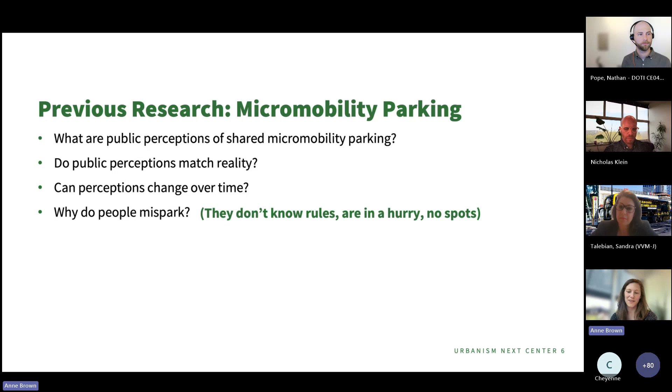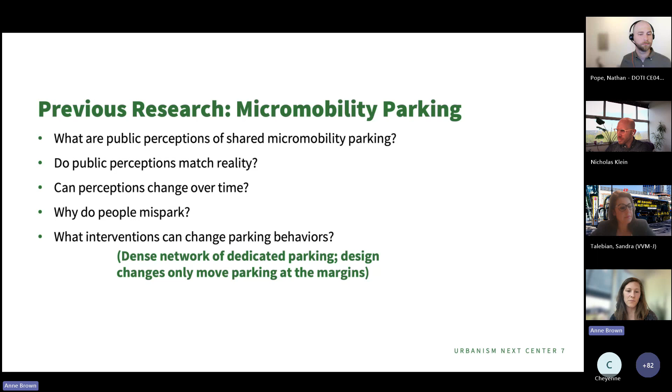Then, what interventions can change parking behaviors? Generally, research shows that dense networks of dedicated parking can shape and shift where people park, and that design can change a little bit of where people park, moving people at the margin. So the most important piece is the density of that parking network, followed by some marginal shifts based on design.

So all these questions and background lead us to the question guiding our webinar today: what are the best practices for how to design, scale, and budget for micromobility parking? The goal of this is really a practice-oriented webinar, hearing from those who have studied these issues and have implemented them.

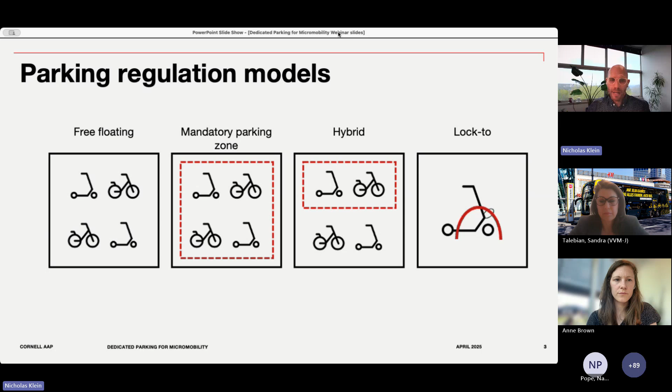If we think about the types of regulations or regulatory schemes you might have, there are free floating programs where users can park anywhere within the zone. We also spoke to people who work in places with mandatory parking zones, where within the zone there are certain geofenced areas where you can park and you can't park elsewhere. Then there are hybrid schemes with a little bit of both—mandatory parking zones downtown, but perhaps more free floating in residential areas. Finally, we talked to people in cities where they operate scooters and bike share systems where you have to lock it to something—so it could be dockless, but it has to be locked to some sort of device.

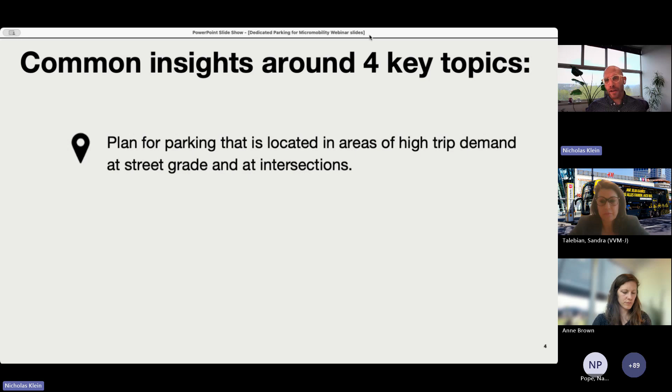I want to highlight 4 key insights or topics we heard from people. The first is that planners, regulators, and other decision makers really need to plan for parking that is located in areas of high trip demand, at street grade, and at intersections. I'll talk more about each of these going forward.

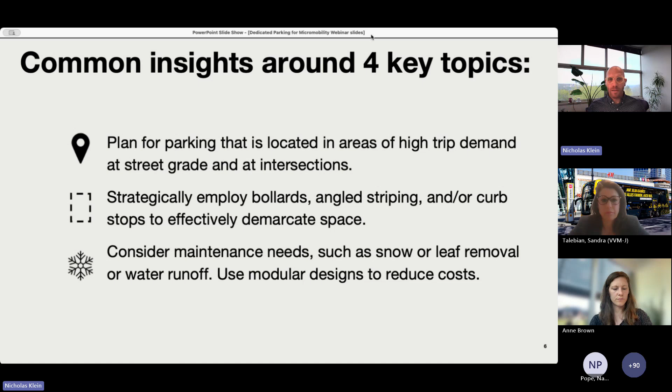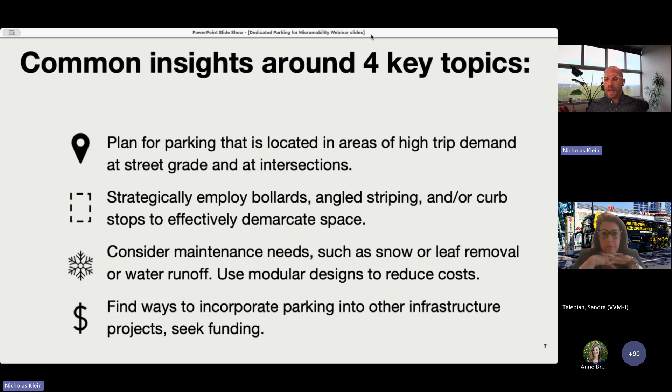Secondly, to strategically employ bollards, angled striping, and curb stops to effectively demarcate space—to say this is where micromobility parking should go. Thirdly, to think about maintenance needs, whether that's snow, leaf, or water runoff, and to use modular designs to reduce costs. And then fourth, to find ways to incorporate parking and other infrastructure into other infrastructure projects, and to think about the funding aspects of this. This is what we call the nuts and bolts.

So I'll start by talking about planning for parking. Each section of the report highlights several recommendations, and I'm only going to talk a little bit about some of them.

Hopefully my colleagues and in the Q&A we could talk about more in detail.

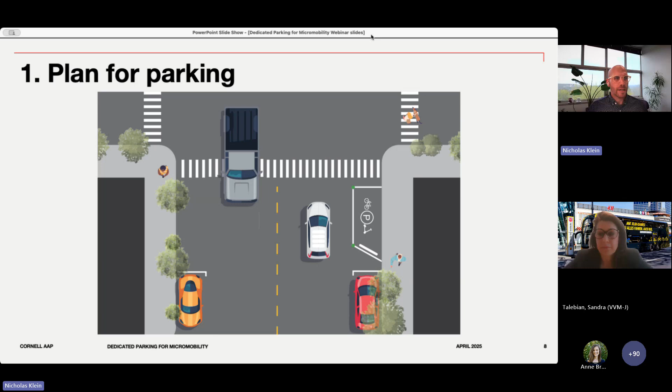One of our recommendations is to build parking at grade on the near side of intersections. This has a number of benefits: it allows for daylighting the intersection to improve visibility and safety for pedestrians and micromobility users. It typically doesn't compete with conflicting uses like metered parking or loading zones—it doesn't mean there are no conflicts, but there are fewer. And it can use previously unused space and possibly generate new revenue through fees paid by micromobility operators.

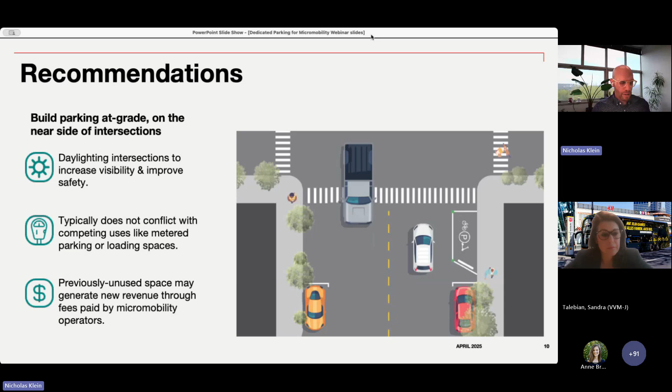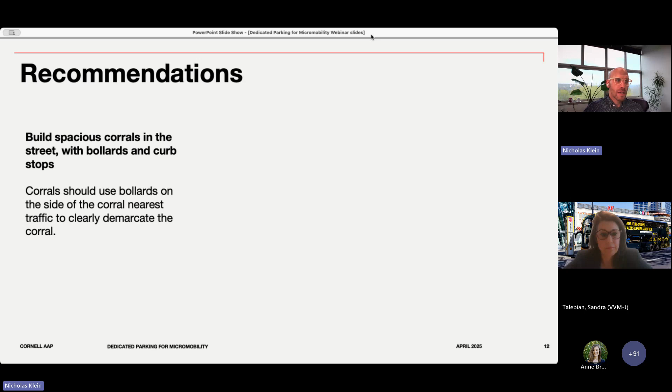Secondly, when it comes to the parking design itself, we heard from a number of different operators, regulators, and planners about ways to think about this. One recommendation was to build spacious corrals in the street with bollards and curb stops, using bollards on the street side nearest to traffic to clearly demarcate the corral.

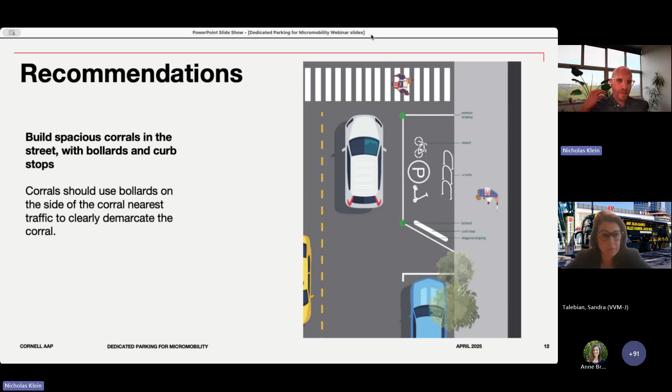In this diagram in the report, you can see the green circles representing the bollards on the street side—sorry, these images aren't popping up—but the idea is not having bollards on the sidewalk side, only on the traffic side.

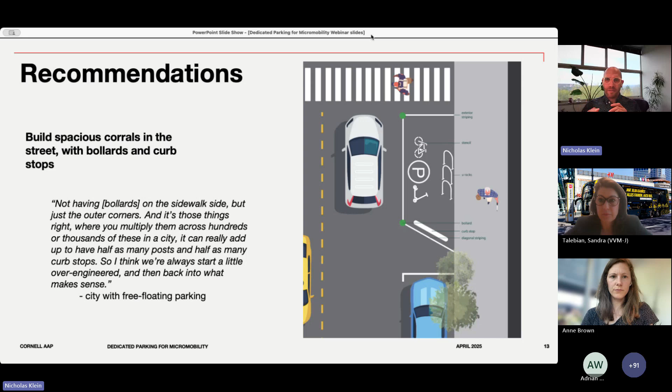We heard from one person who said that these kinds of design choices, when multiplied across hundreds and thousands of spaces across the city, can really add up to half as many posts and half as many curb stops. They said we tend to start over-engineered, then work back to figure out the minimal requirements for a safe, well-regulated, well-managed on-street corral. Someone else said, we realized maybe we just need one curb stop—shown at the bottom edge of that diagram—which reduces cost, and it wasn't really needed on the intersection side since vehicles don't park there.

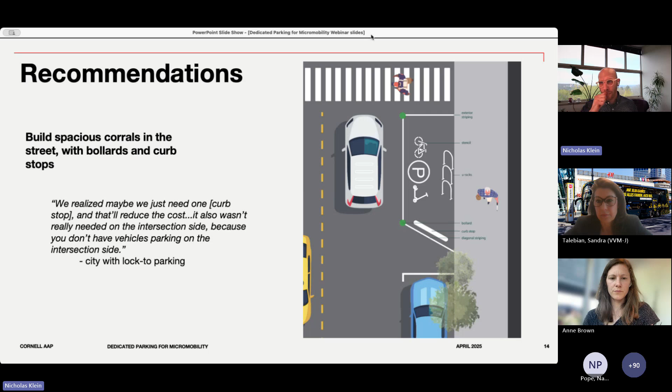When it comes to maintenance considerations, we heard a lot from people about thinking about seasonality, using modular designs, and trying to keep it simple.

Taking winter into consideration, one person said that on-street corrals are going to be a nightmare for snow clearance—it's not really feasible to get them cleared without destroying the bollards all the time. So we find that sidewalk corrals are much more feasible.

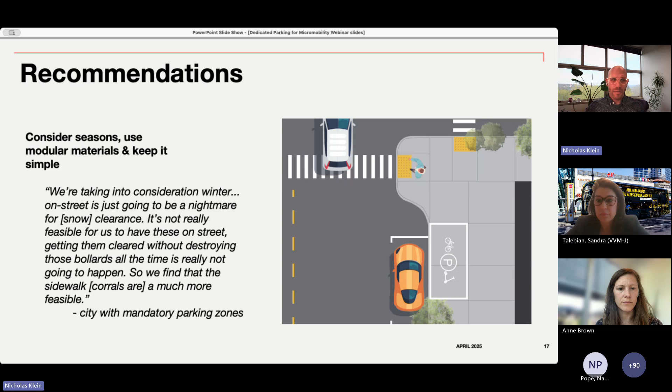In the previous slide we talked about on-street corrals; here we're talking about sidewalk corrals. A recurring theme is recognizing local context—not just of the intersection, but of the city itself and what's going on there.

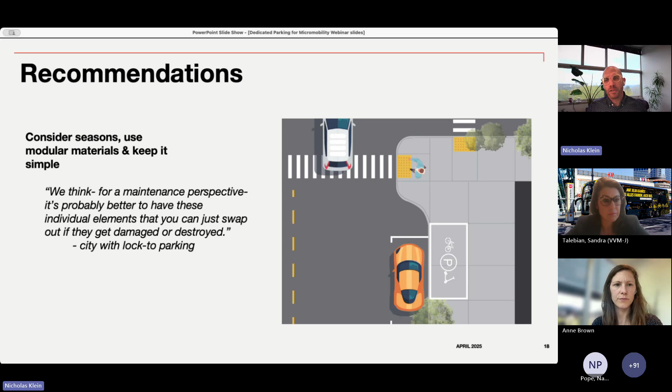Another person said that from a maintenance perspective, it's probably better to have individual elements you can swap out if damaged or destroyed—thinking about modular designs rather than hard infrastructure that's more difficult to install and replace. Another person emphasized keeping it simple, noting this allowed them to roll it out at a much bigger scale for very low cost.

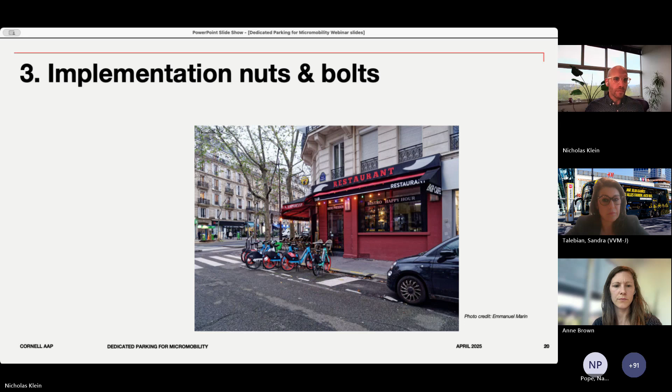It's very minimal. So now turning to the nuts and bolts of this, we heard about identifying funding streams, streamlining processes, thinking about grants, and recognizing that micromobility parking is relatively affordable.

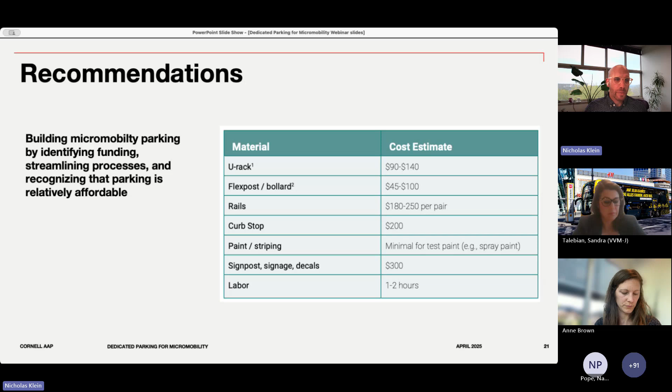One example: people told us that two U.S. cities estimated the material cost for a single corral would cost just over $1,000 USD for 4 racks, 1 rail set, and 5 flexposts. We have a couple other cost examples in the report, and obviously prices are changing—who knows what the latest cost would be.

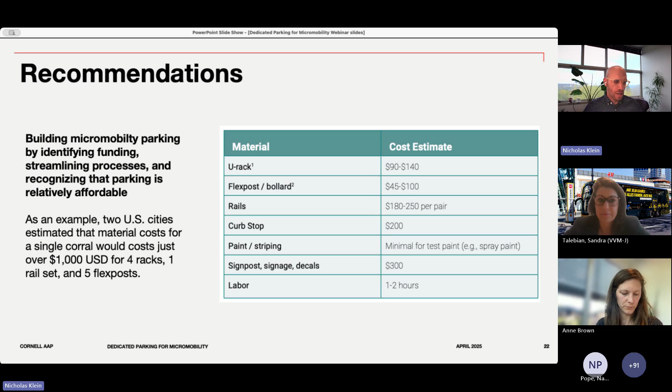But just to give a sense, relatively speaking compared to other transportation infrastructure, this kind of parking can be relatively affordable. So I'm going to wrap it up there to give you a tease of the report and let my colleagues talk in more detail about their experiences. Thanks, Anne.

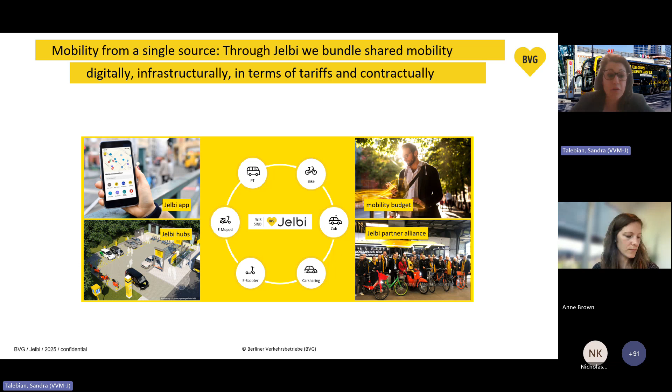We have the Jelbi hubs, our parking hubs - I will explain them shortly. We have a mobility budget where we bring companies all the different mobility options as a new sustainable mobility option to their employees. And we build up a huge Berlin-wide partner alliance with all the different stakeholders.

A lot of the stakeholders are for sure the mobility providers, you see them here on the left side - scooters, bike sharing, car sharing, etc., and for sure public transport. We built those in combination with facility partners - hospitals, shopping centers, housing companies, and so on, and also a lot of facilities like gas stations, etc. So we bring all the different stakeholders together by implementing the new mobility solutions.

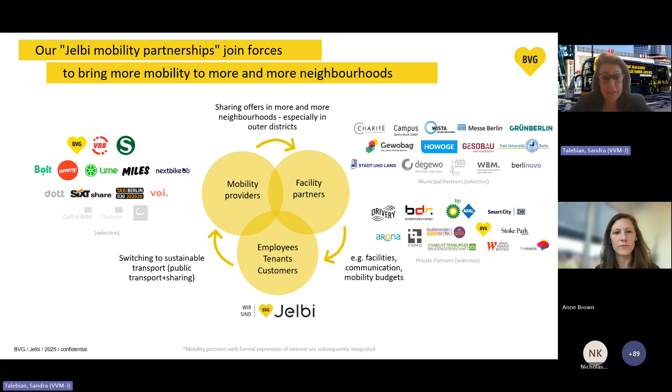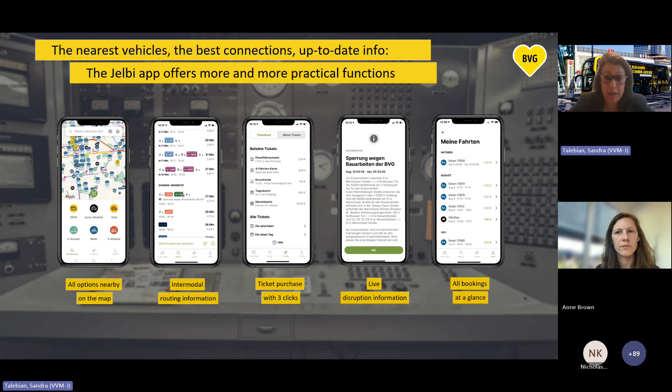The app brings you all the different options in one solution, so you don't need to download all the different providers' applications. You can have that all seamlessly - ticket purchase, car sharing, and also kick scooters - in one application.

We bring that to Berlin, and how we do that since 5 years - I'll draw down the process chain of how we come to those spaces. So either we implement the Jelbi hubs on a public space, we have a data mobility platform that we can use where we see live status, where the vehicles are parked right now, so we can identify hotspots.

Where mobility parking is urgently needed, we do the location review - we have an on-site visit, we go with all the different stakeholders there, walking all the different spots and really check if this is a possible spot to implement a Jelbi hub. Then we send out the forms, if it's a public space, to the different districts. Then we go into the planning, and after getting approval from the district, we build it and then open it and inform the sharing providers.

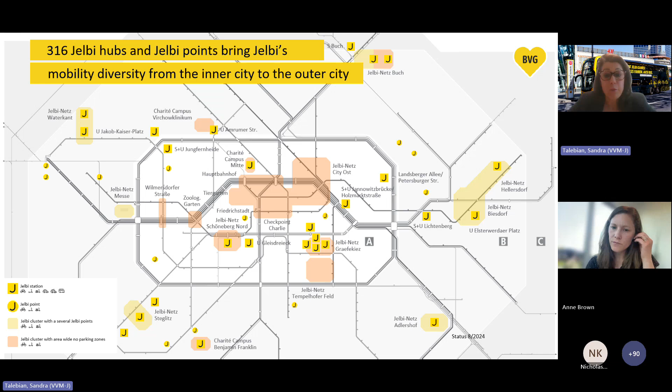We have with the city of Berlin, with the Senate, 3 different options where we are financed. We have a research and development project until end of this year - so this year is actually a very important year for us to really prove that we bring a benefit to the mobility change and mobility behavior of the Berliners and visitors, etc. We need to prove until end of this year that this is also viable for further development.

We have a second partnership or contract with the city of Berlin that brings us into those dense areas where we implement, every 200 meters, mobility parking to really bring order and cleanness on the pathways and get rid of the clutter or different things. And the last project that we call JaaS - it's Jelbi as a Service.

We are implementing Jelbi hubs and points for private partners where, for example, the big hospital Charité in Berlin, paid for having mobility options at their door for their employees. So we built 3 different channels of financing, and we will see where we end up before the new finance round is agreed.

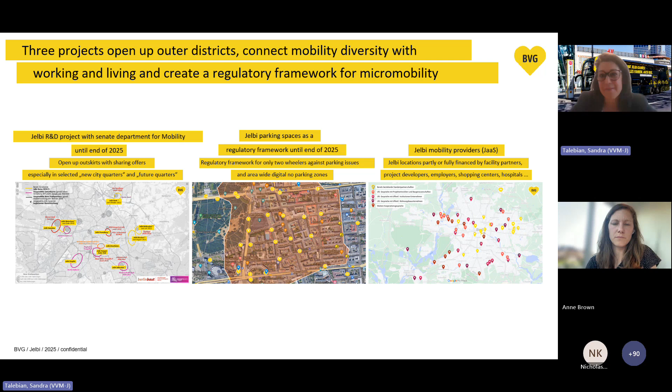What topics need to be taken care of while implementing parking spots for micromobility? First, it's planning, monitoring and evaluation, to really check in which areas it makes sense, where the operators are going, where there's a high need for implementing hubs. We need to measure those.

We have 2 dashboards where we check the usage of our hubs. And as you build more hubs, you need to take care of them because some are temporarily closed and we need to find new solutions. So in the long term it's a topic too.

All the different stakeholders—we have over 20 different sharing providers on Berlin streets—we need to take care of and organize, so it's a lot of work and operating and controlling. We have different service providers.

As mentioned already, winter service we need to take care of in the winter season, facility management, communication—all the different things. We need to talk with the districts, with the police. When there are big events, we need to make sure all the sharing mobility options are cleared in case of a temporary closure.

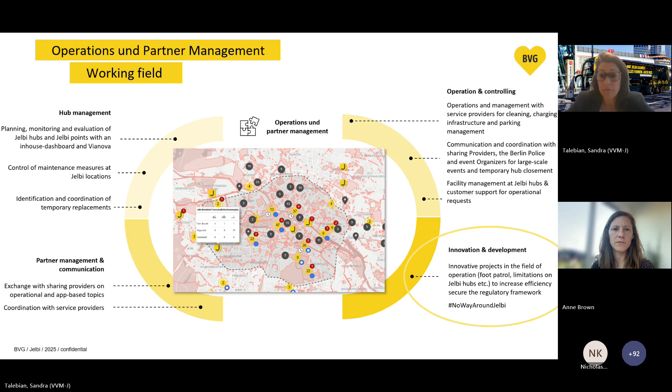And that is nearly all from my end. So the foot patrol is sharing-wide.

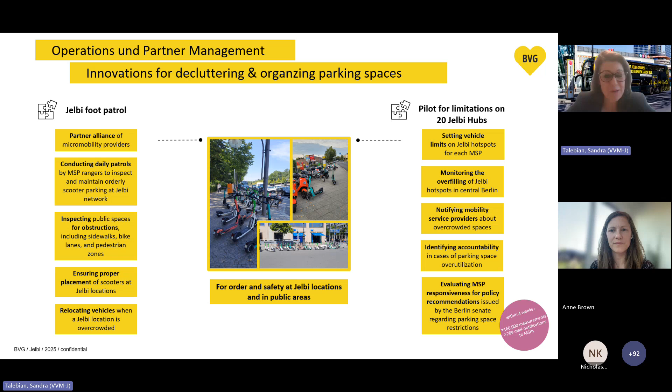That is more or less what we do in Berlin with our more than 300 Jelbi hubs, with the aim of having a more livable Berlin. Thank you all.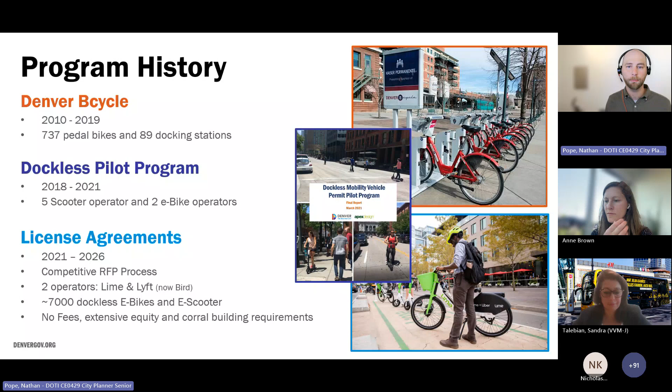We did a pilot program and are currently in our license agreements. Those were a competitive process that selected 2 vendors, Lime and Lyft, who has now transitioned to Bird, where we have about 7,000 e-bikes and e-scooters. One thing that makes our program unique is we have no fees, but we have extensive equity and corral building requirements for our 2 vendors, which has led to the program being very successful. We had 6.6 million trips here in 2024 and are on for another record-setting year in 2025.

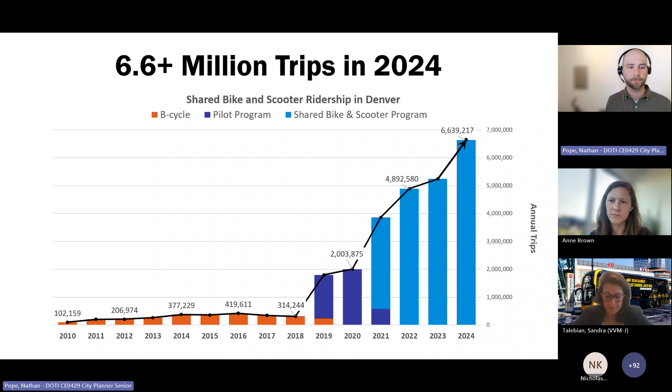We really like this program because it's helping to support our city mobility goals. It's expanding transportation options and providing affordable transportation. I think we have the largest equity program of its kind for shared micromobility anywhere in the US, and possibly the world. We know it's replacing car trips. We did a survey and asked folks, if a scooter wasn't available, what would you have taken instead? 50% of folks said they were going to either drive themselves or take an Uber or a Lyft.

So I don't need to tell you all that, but I do like to talk about the benefits of the program before we get into some of the challenges around parking. I really want to talk about a couple things we are doing around parking corral design to start things off, and talking about placement, branding, how it's all coming together, and the lessons learned here in Denver.

I am certainly not a one-man team. We have a wonderful bike parking team that really should be taking all the credit for the great work that's been done here. But just to give you an idea, we started with just your basic U-rack, and then we started experimenting with U-rack corrals. And right about that time, scooters came into the picture and we had to figure out how to manage all of them.

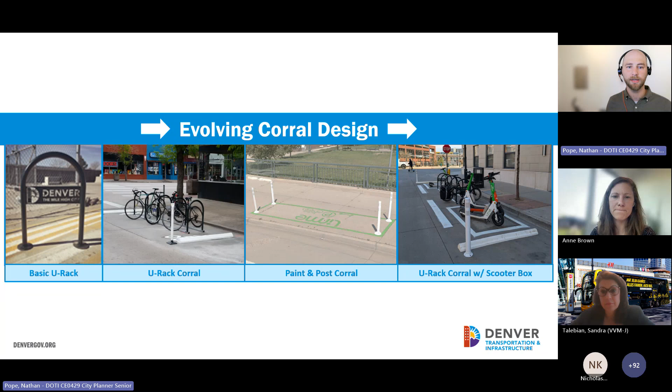In our contracts, we have the operators build the corrals. So we started off nice and simple with paint and post corrals. There's still plenty of those around the city. But where we've been really over the past year plus now is with U-racks and scooter boxes, kind of taking the best of both worlds, where you have that U-rack where a private device or a shared bike can use it, and then a box for scooters that have the self-standing kickstand. So that's where we are with the design of the corral.

I think placement is another key part. We started above curb where we had space. It was a logical place to begin with, but really, as we learn more about people's usage of these devices, it quickly became clear that below curb is the way to go. We really don't want to have folks riding on the sidewalk where we can avoid it. Currently, sidewalk riding is illegal, and if you put the corral above the curb, people are going to ride on the sidewalk at some point in their journey. So locating them below the curb has been a very successful tool, not just for getting great parking outcomes, but also reducing sidewalk riding.

Really, where we're at currently is we like to site them inside our protected bike lane. So we're building out our protected bike lane network, and at the intersections, we have that daylighting space that Nick mentioned. That's really been a key, perfect location for siting these corrals. There's plenty of other trade-offs we're looking at when we're looking at placement - curb space trade-offs, if we're having to take a meter space or something like that, is it adjacent to a bike facility, is it adjacent to a transit facility. All these things really impact where exactly at the intersection the corral goes. But really our ideal location is inside the protected bike lane.

Another thing that makes Denver unique is that we don't have vendor fees that we charge. Instead, we require them to build the corral network. So we started off with kind of vendor branded corrals, where you have a green box for Lime and a pink box for Lyft. That worked great at getting a lot of corrals out in the streets quickly. They had more resources to deploy to build these corrals, and they could do a lot of the site visits and maintenance quickly.

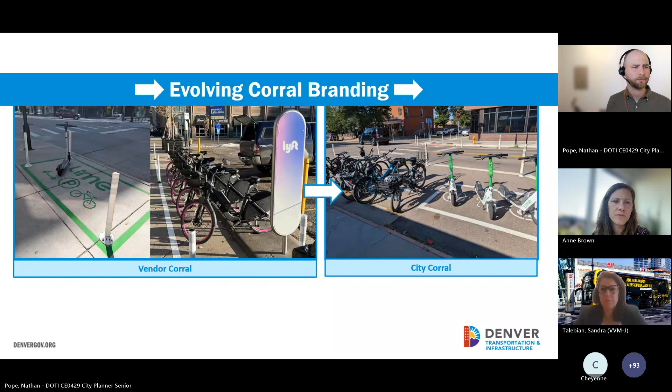Some ongoing challenges. We are far from perfect here in Denver, and we have a lot of work to continue to do as the program grows.

One thing that's really becoming more common now in our highest ridership areas is corral overflow, where your corral is full, so people start parking in the bike lane or on the sidewalk. How can we expand our corrals? And if that's not possible, how can we make sure the vendors are rebalancing timely enough?

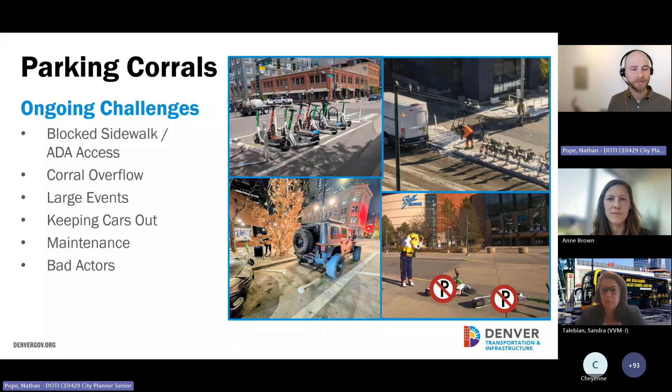I put bad actors on there as well, because even if everything is going perfect, it just takes one person with a little too much time on their hands to create a mess. This is an older photo, but we still see folks going down the street tipping over every device, doing that domino thing. That continues to be a challenge, and we struggle sometimes to respond quickly enough. Then that's where we get the photo that makes the news or something like that.

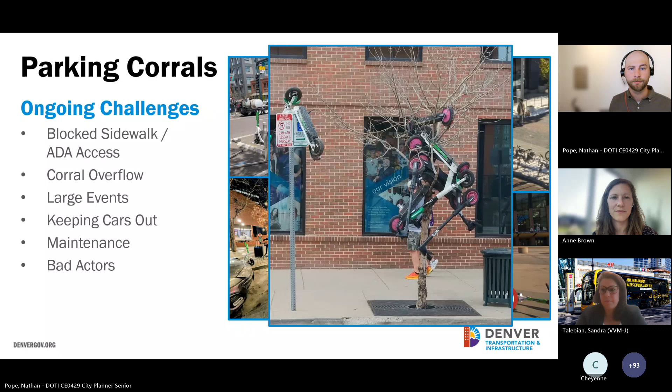So what's next for corrals in Denver? We want to upgrade those legacy corrals—paint and post corrals—into more robust city infrastructure corrals. We want a predictable network where downtown we have a corral at every intersection. Every intersection should be predictable—you'll know there's a dedicated place to park your device.

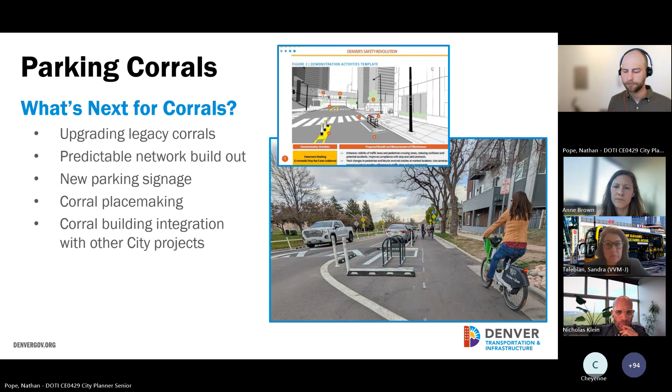Real quick, just want to touch on some other aspects beyond infrastructure. Education I always say is necessary but not sufficient—we always have to be doing education, because there are always new people coming to the program, whether tourists or folks trying it locally for the first time. We have good messaging with partners, our BIDs and tourism organizations, and we're even trying to get messaging on the key cards for local hotels.

And then technology is great—it works some of the time, and it doesn't work some of the other times.

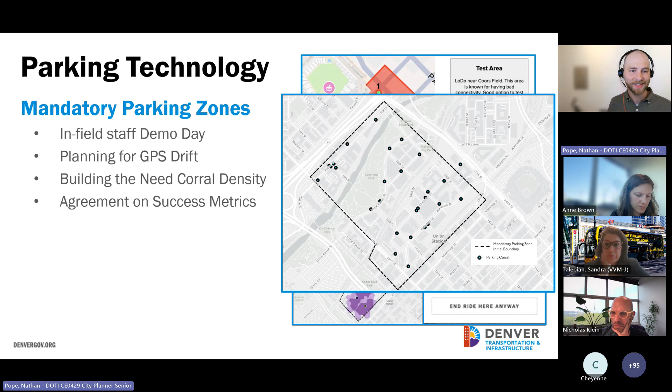So always going out in the field, testing things, especially as we're dipping our toes into the mandatory parking zone world, planning for that GPS drift, understanding what that's going to mean, and really making sure we have the density of corrals. This is one of our first large-scale mandatory parking zones, and we really made sure to have a corral at every intersection, so there was no excuse that folks weren't close enough to a corral to park.

And then there's these complementary other technologies being rolled out by the vendors. Sometimes they're great and awesome and it's the future, and sometimes they don't work perfectly. So I dragged some of my colleagues out there to test some of these new technologies in real world situations.

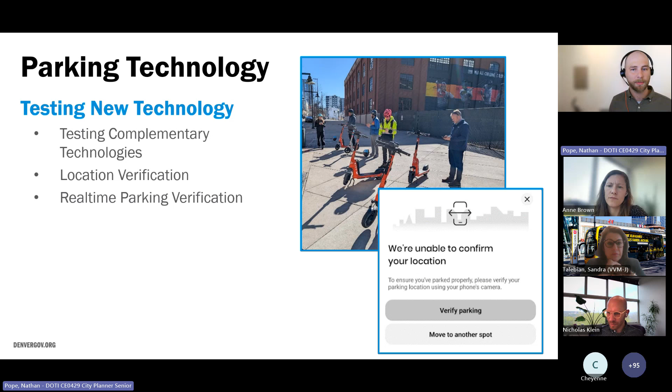Location verification, I think, is great to scan your surroundings and let the GPS have more accuracy to precisely know where you are when you're parking. And then real-time parking verification is something I'm really excited about. Still not perfect, but instead of just taking a photo of where you've parked, you do a little scan of where you've parked and it says, hey, you've parked correctly, you can end your trip, or hey, you're blocking the sidewalk, move the device to a correct parking location, and then we'll let you end your trip. Really excited about that because it prevents the misparked device from happening in the first place.

Overall, though, just like anything in this industry, there's no silver bullets. It takes a layered approach. There's no one size fits all. No one intersection design can fit every different situation. So being nimble and flexible. That's it for me. Really appreciate the time and excited to answer questions.